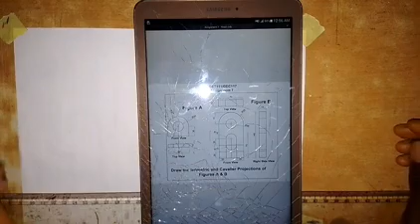As instructed, we should draw the isometric and cavalier projections of figure A and figure B. We are working on figure A now, and we are going to be producing the isometric view of this object, as you can see on the screen.

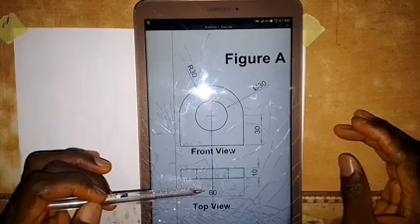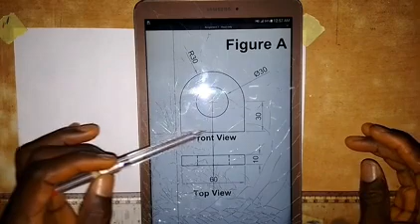For the dimensions: for this circle, the diameter is 30, and for this curve, the radius is 30. The center line of the circle, the horizontal center line, is 30 millimeters from this line here.

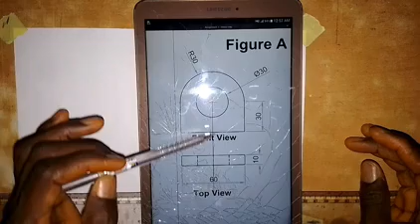Coming to the plan, this is the plan or top view, and this is the front elevation. The thickness from here to here is 10, and the length from here to here is 60, which is also the same as the length from here to here.

So let's work on the isometric view of this object. The first thing we are going to do is draw a horizontal line, a short horizontal line like this.

Though we are not given the lowest point, I'm going to place it myself. On this side, I'm going to draw this line in this direction, and then turn my set square like this and draw this line in this direction.

Then I'm going to draw a vertical line from this point, up like this, and then I'll be taking the measurements now. I'm going to take 60 millimeters on this side here.

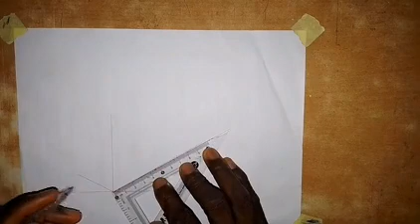So here we have 60 millimeters. This is 60 millimeters here, so I'm not taking it again - this is 60 millimeters. I took it from zero.

Then we take 10 millimeters here on this side from this point. So this is 10 millimeters here. So we have this - the next thing I'm going to do is draw a vertical line from this point.

I will draw a vertical line here from this point up, and I will also come here and draw a vertical line. So we have the vertical line, and then the next thing that I'm going to do is...

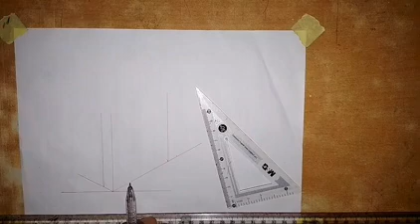As we have here in the question, the distance from here to here is 30 and the radius of this circle is also 30, so we have 30 plus 30, and that gives us 60. So the height is 60 millimeters. We take it here from zero, and this is 60 millimeters here.

So we are going to draw a line from this point to touch this line, and then we turn our set square like this, and draw a line in this direction.

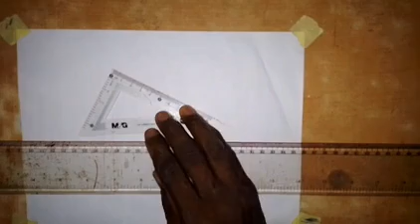Coming to this point here, I will draw a line in this direction, and then turn the set square like this and draw a line to touch this line. So this is what we have to do first.

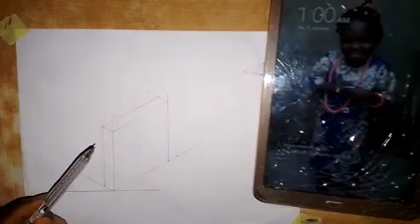The next thing that we are going to do is construct this semicircle that we have here in the elevation. This is how we are going to do it.

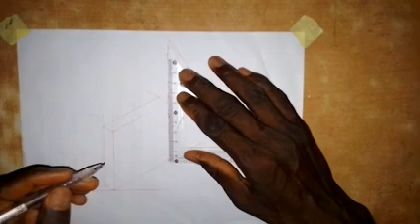First we divide this 60 millimeters square into 2 equal parts - so this is 30, and we also divide into 2 equal parts down here, taking 30, so this is the midpoint.

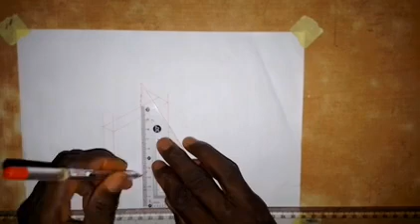So here we are going to draw a vertical line at this point, and then with the set square, we draw a line in this direction from this point, meeting this line here.

The next thing we are going to do is connect this corner and this corner together - the longest diagonal. We draw a line through the longest diagonal, and it goes like this.

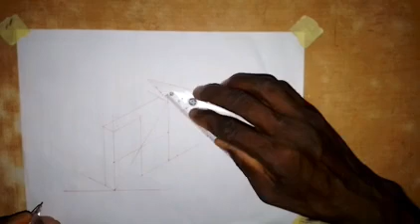Alright, so the next thing I'm going to do is draw a line from this point to join this point here. I'm not going to label it. This is the center of the arc that we are going to use.

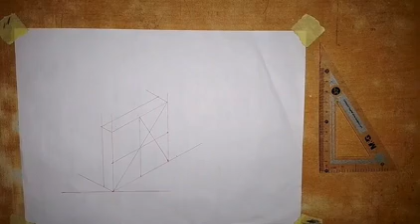So let's look at it now. We take our compass, putting it at this point here, and then extend to this point here. I need to reduce this a bit.

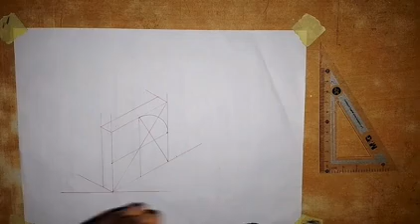So then I'm going to draw an arc from this point, like this. Okay, so we have this arc now. Then the next thing is we take this point as the center and extend the compass to this point here, and draw an arc like this.

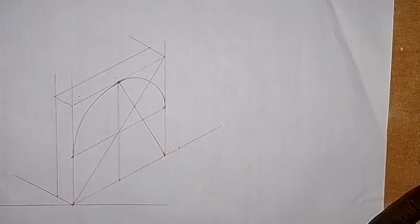Alright, so we have this now. Then we also have this curve part on this part here, so we need to produce that curve. This is what I do to work the curve on this part out.

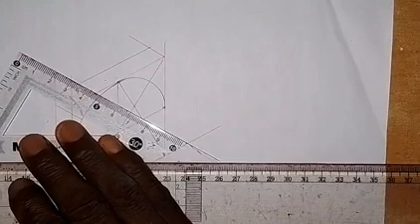So what you are to do is draw a line from here to touch this line, and then take some point here, just come up a little bit. Draw a line to this side, then come up to this point, just move a little bit away, and draw a line from here to this side. Then coming to this point here, draw a line to touch this one, and then come to this point on this line, draw a line from this point to this side.

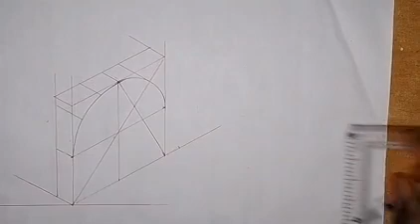Now the thickness from here to here is 10 millimeters. So you come to this point here, take 10 millimeters to this side, on this line. This is 10 millimeters.

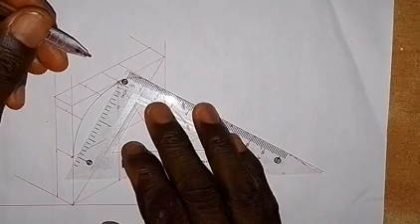Then coming to this point, take 10 millimeters to this side. This is already 10 millimeters, so we just come here and take another 10 millimeters from here. From this point, take 10 millimeters. So here we have 10 millimeters here.

Alright, so the next thing I'm going to do is take this point here, right from this point, and this point here, going to this point here. So we are going to join them together with the use of a French curve, and this is how it goes. We take the French curve, and first of all connect these two points together.

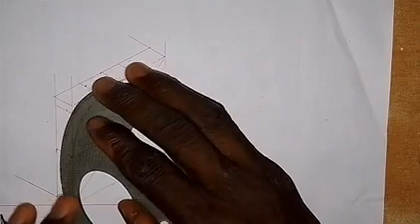So you have to set the French curve very well, make sure you can see the point and draw this line. I can use my compass to do that, but I go with this method from time to time. Okay, so you can see the curve is coming out.

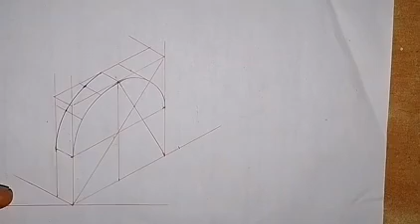Also join this point together like this. Okay, then so we have a point here. For the point that we have here, always be careful with it, because looking at this point now, if I draw the curve like that, the line will not be okay.

So what I will do is, from this point here, I'll just take 10. So I'll take 10 here like this, take this point and take 10 from a point here. That's what I'm going to do, then I'm going to join. So I just turn like this and join this together with this.

Alright, so what we need is to make sure there's a curve coming out here, so we have a curve here. So just go on like that.

So this line now, make this line a thick line from here to here, letting it join this diagonal line. And then we are going to make this line a thick line, and then we also make this line a thick line.

So this line also, we make it a thick line. And then this line here, we also make it a thick line. Alright, so now we have a circle here in the center whose diameter is 30 millimeters.

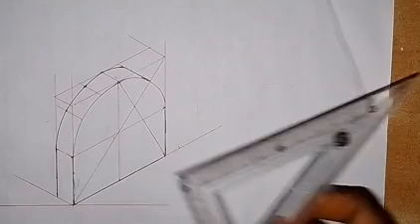So let's quickly construct that circle. What we have to do is divide 30 by 2, that is 15. So from the center here, take 15 millimeters down to this side, and take 15 millimeters up.

So if we look at this one, we have that 15 millimeters at this point, and also on this vertical line. We take 15 millimeters down, so this is 15 millimeters, then take 15 millimeters up, so this is 15 millimeters to make that 30.

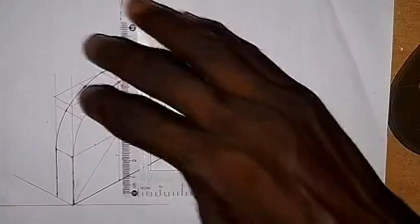So what we have to do now, with our 30 degree set square, we are going to draw a line from here to here, and then come up here and also draw a line through this point, and then draw a vertical line through this point. Alright, so we have this now.

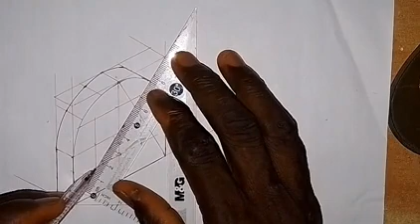So we have already drawn this diagonal line, and then we are going to connect this point here with this line, and at the same time we also connect this point to this point, and this same point we connect it to this point. So this is the 4-center method that we use to construct an isometric circle.

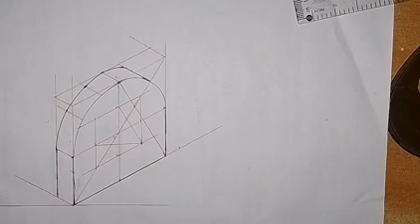So draw from here to here. We are making use of this point and this point. So those are the points that we use to draw the isometric circle.

So we put the compass point here, extend to this particular point that we have here, and then we are going to draw an arc like this.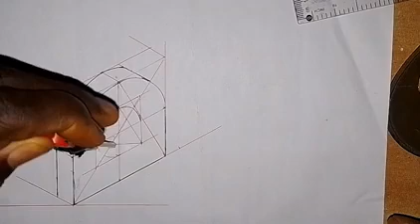So we draw this arc, and then we put the point at this point here. From this point we draw an arc. Alright, so this is the isometric circle.

So all you have to do is make use of this point. Extend your compass to this point and draw this arc from here to here, then use this point, extend to this point here and draw this arc from here to here, and then we make use of this point and extend the compass here, draw this arc, put it at this point and draw this arc.

So that's it. But we are not done with this work, because the thickness from here to here is 10, and that means we should be able to see part of the circle on this side here.

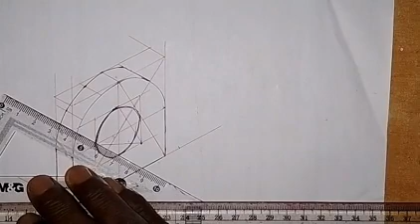So what I do in this case is take some points. I'll take a point from here, draw a line inward like this, and then come to this point here.

So this point I will have here, and on this line I will draw a line inward, and then come to this point here and draw a line inward like this. Then coming to this point, I will also draw a line inward from this point.

Then I'm going to take the measurement of 10 millimeters. On this line I take 10 millimeters from here, so that's 10, and then from this point I take 10 millimeters. Then coming to this point here, I also take 10 millimeters, and at this point here I take 10 millimeters.

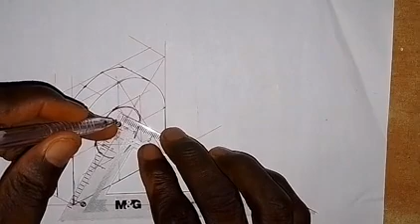Alright, so all these points I'm going to join together with the use of a French curve, like this. So I will turn my French curve, making sure that the points are well laid on the curve, and then draw, joining them together like this.

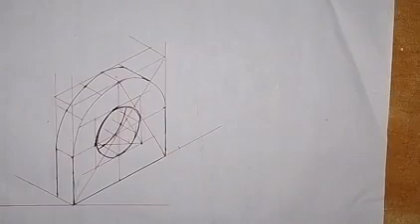Alright, so this is how the hole will be. If you look at it, you can see the other part of the hole here. So this is how it's supposed to be done.